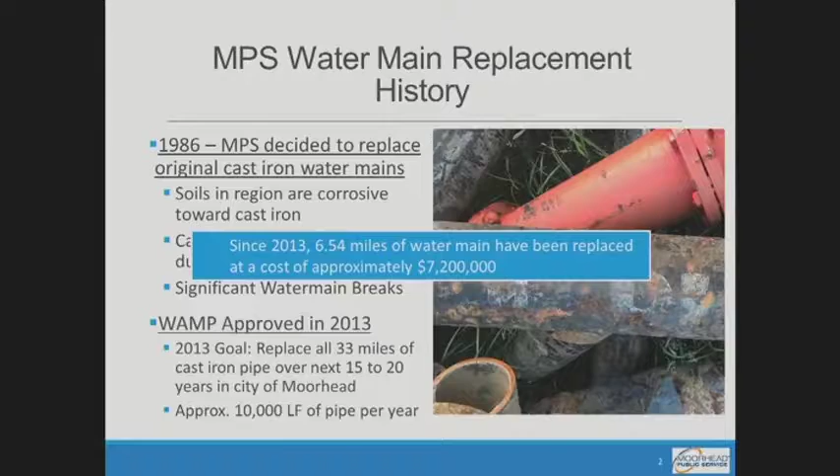I'll highlight a few things with regard to the money we've spent and the impact it's had on water main breaks.

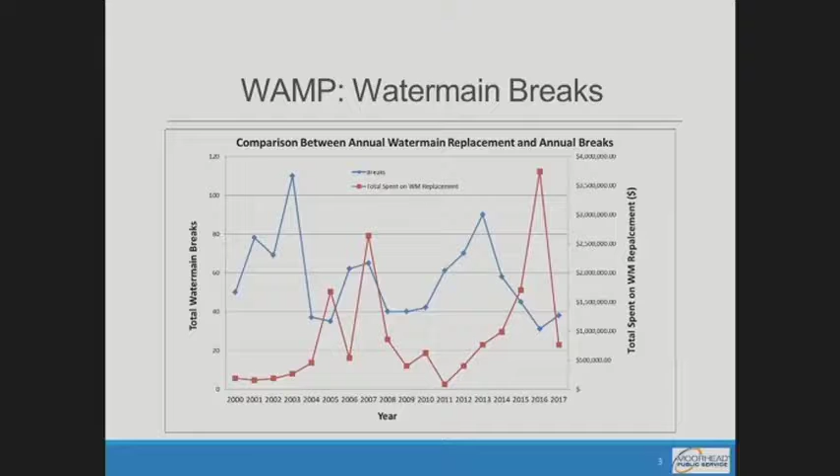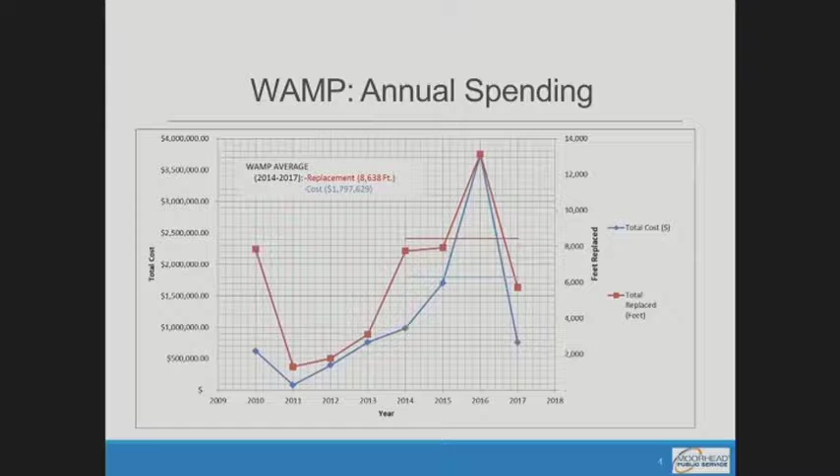But in years where we're doing replacement in residential areas, such as 2014, 2015, and 2017, that spread becomes greater, meaning we're doing replacement on a more cost-efficient basis, getting a higher amount of water main in for less cost. We take an analytical approach to how we can get the most replacement for the least amount of money, since we have a fixed amount of money to spend, and we really try to get the most footage we can for that fixed amount.

Collaboration is important for a variety of reasons, mainly that we can save on pavement restoration costs. Depending on the project, sometimes we'll bid it separately from the pavement project, since the contractors that bid on our work might not be the same ones that bid on a street project. That's the case for Center Avenue this year, with two different bid packages: the MPS water main project and the street project. So they're two different bid projects, but there's oftentimes a financial incentive for doing that.

Because pavement restoration is such a huge part of our total cost for replacement, that's really where we focus on reducing the amount of pavement we have to restore. Just by coordinating with the city, and the cooperation we've had with them, we were able to save roughly $240,000 in '17 and '18 on those coordinated projects alone. I'll talk a little about how those savings were realized, but the important piece is really good collaboration with the city and being able to do projects together.

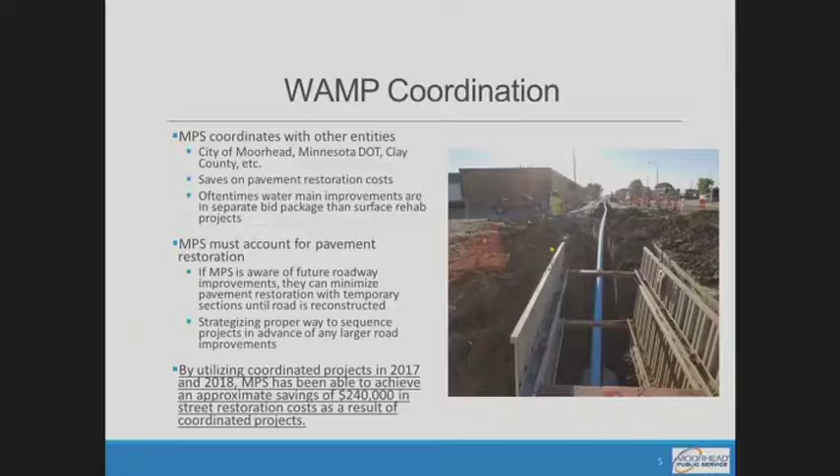One of the main reasons we were able to realize some of those costs was utilization of something called trenchless technologies for water main replacement. Trenchless technologies are really three different construction methods we use to realize those cost savings: horizontal directional drilling, pipe bursting, and slip lining. Those are the three main methods. We've used all three of them, particularly in the downtown area.

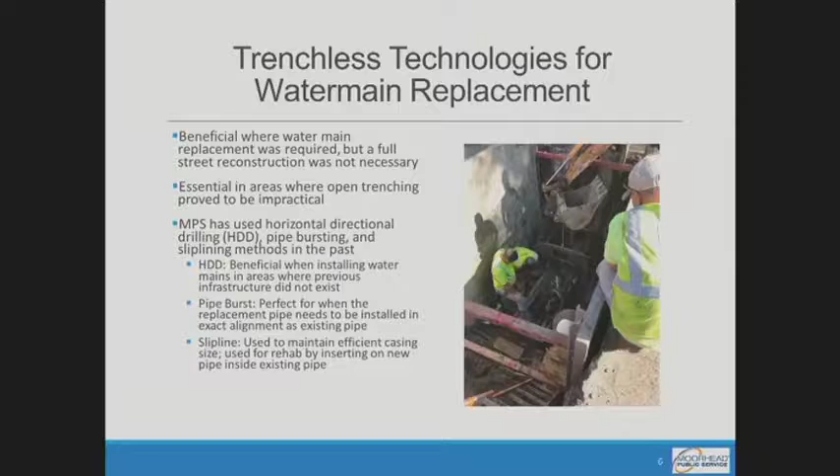We've had really good success using pipe bursting and directional drilling. Directional drilling was primarily used on Sims. We'll be using pipe bursting and directional drilling on the Center Avenue project upcoming here in 2019. Slip lining is actually where you put a new pipe inside of an old pipe, and we used that for a large portion of Center Avenue, generating significant savings as a result of using that technology. Just to give you a little flavor for our replacement portfolio and how we've integrated those technologies into our construction methods...

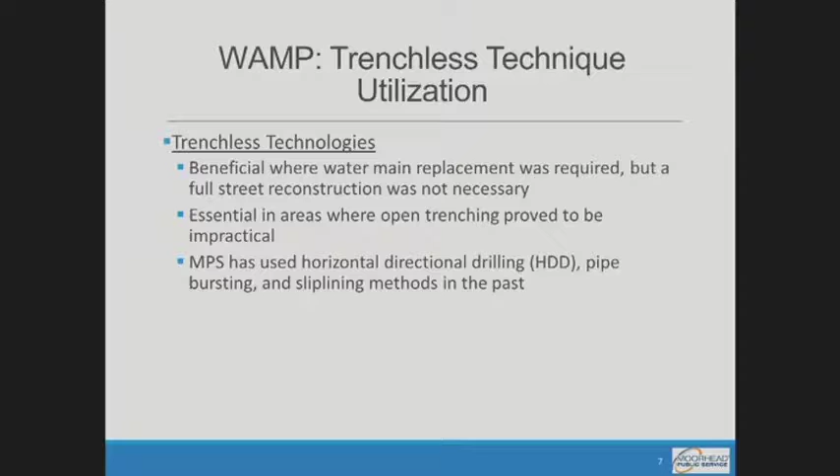In this particular project, we were fortunate that the city identified this as a really high priority project, and the city actually changed some of their plans to fit this project in for a street rehab project. So it worked fantastically well.

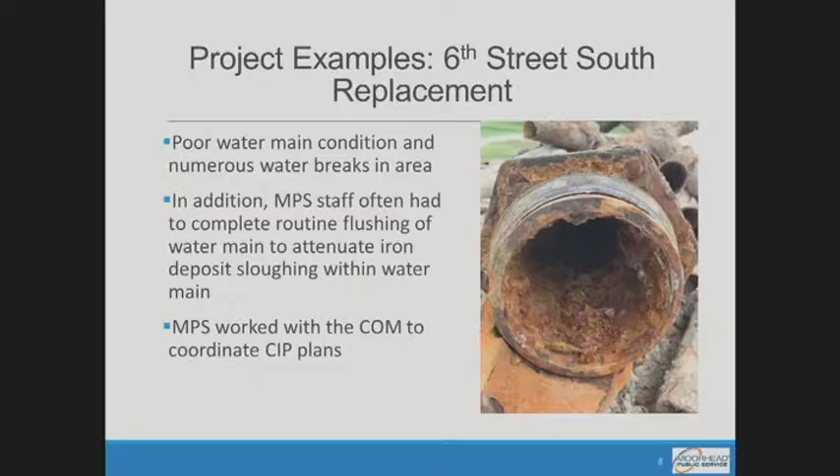And we got some really good feedback from the residents. We were able to pull that pipe using pipe bursting, basically pulling that new pipe in the existing alignment of the old pipe. We got good feedback from the customers, very little disruption to those folks, and they were very pleased when we were done. No more rusty water complaints. So a very good project that we were able to do cost effectively.

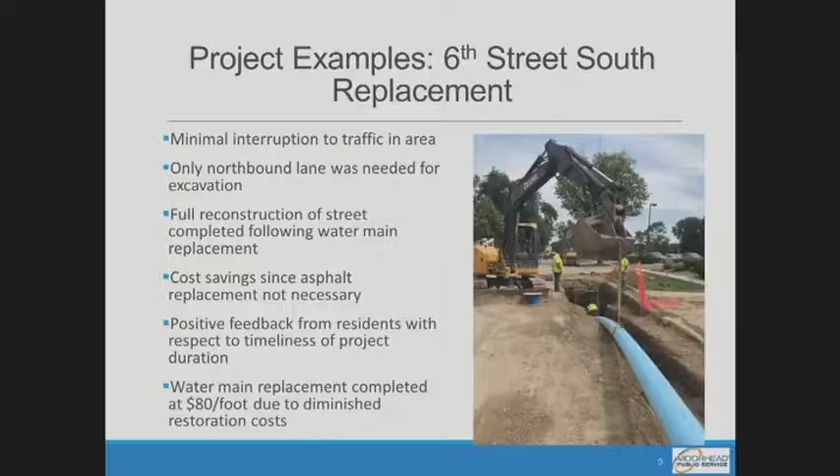Instead of bringing the asphalt completely up to grade, we only fill the pits partially full, so it's just a few inches below grade. This saves a lot of money on asphalt for the pits themselves. The city then comes in and mills the rest of it off, so there's no additional cost to the city, and we save on the reduced asphalt needed to fill it partially up to grade.

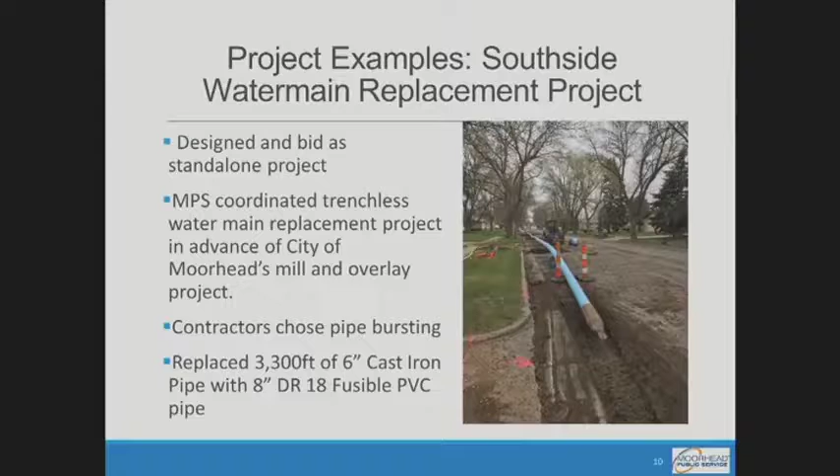Here's another picture of that particular project. When we have all those pits open, safety is a big concern, so we had to make sure snow fence, appropriate road closures, and everything were maintained. We got a lot of positive feedback, it was pretty minimally invasive, and we were able to get in and out in about a two-month period. The project went very well.

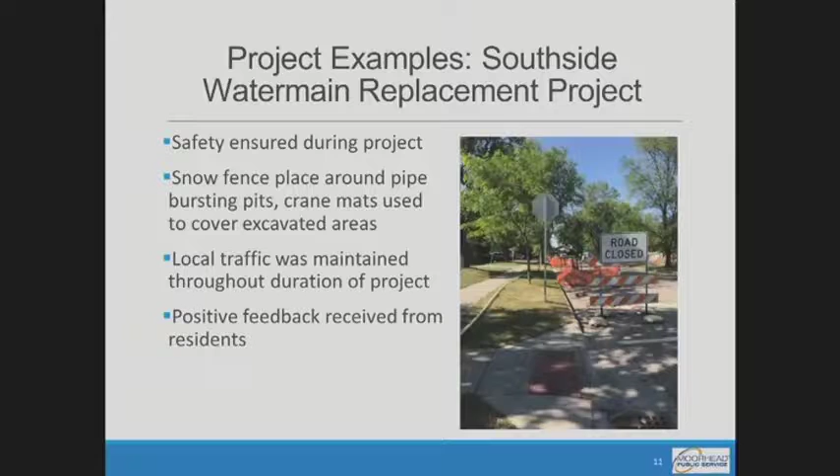I just wanted to provide a couple of examples, one of a self-performed project and one of a contracted project. Typically our breakdown of self-performed to contracted work is about 50-50, but lately, because we've been doing so much more water main replacement, we perform about 40%, and contractors do about 60%.

Looking into the future and some of our next steps, I wanted to highlight some of the areas we've completed since implementation of the WAMP, and some of the areas we're going to need to work on going forward.

What changed in the techniques or composition they used? A couple things - construction quality was reduced because of the war effort, and the factor of safety changed. Factor of safety is an engineering term for the degree of safety in the design standards; it went from a 10 to a 3, so a higher factor of safety represents better construction. They reduced the factor of safety significantly. Ultimately, the pipe wall is thinner, and that thinner pipe wall contributes to more water main breaks and faster, more corrosion issues.

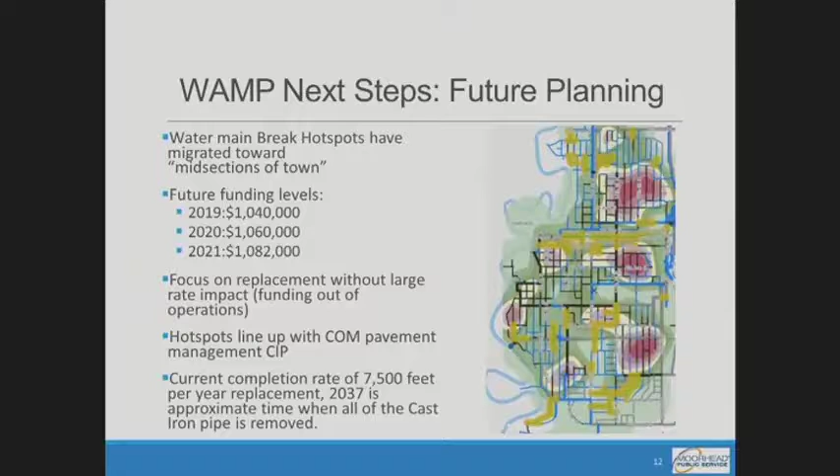Some of the things we'll also be working on is continuing to maintain our system, doing additional valve replacement and hydrant replacement as we can. We've had a real strong focus toward replacement, but that's taken a bit of a back seat to our maintenance tasks. Over the next couple of years we'll have to work some of those maintenance tasks back into our construction routine. So that's the presentation. I'd be happy to take any questions.

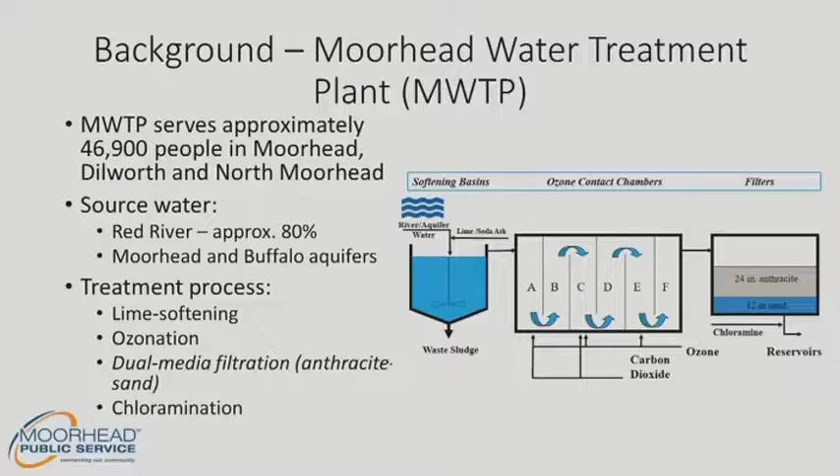We mainly use the Red River for source water, and one of the challenges with that source water is that the water quality fluctuates a great deal based on seasonal changes. In the spring, we often get spikes of organic material, lots of mud or other debris going into the river. Those factors really complicate the water treatment process for us.

I call them influent TOC spikes, which just means more organic materials going into the river. One of the challenges we have is those spikes often occur when the water temperature is really cold. In the early spring, the water temp is just barely above freezing, and that's when we start to see runoff, and a lot of those organic materials go into the river.

Our ozone treatment process is really good at taking out a majority of those organic compounds, specifically the ones that cause taste and odor issues. However, there are times when the ozonation process can't remove all of them. So a couple of the things we'll talk about tonight are these two chemicals called geosmin and MIB. They're secondary metabolites of bacteria, and if you've ever tasted or liked the taste of beets, that taste is attributable to geosmin. So if you like beets, you like geosmin. If you don't like beets, you'll probably find the taste off-putting, and you'll probably call and complain about the taste of your water if geosmin is in it.

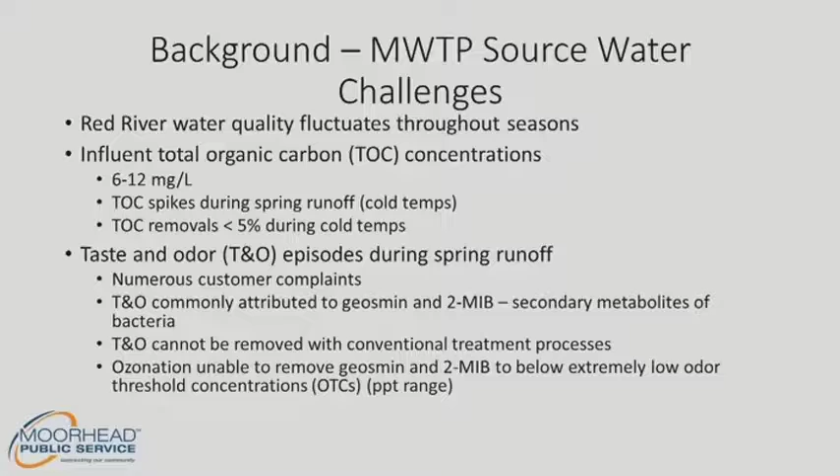As I mentioned, in 2017 we did a cooperative purchase with the City of Fargo to purchase this pilot equipment. The purchase was based on the fact that our existing anthracite sand filters, the anthracite media in those filters, is in need of replacement. It's been operating since the plant was built, and it's operated very well, but the lifespan of the media itself is about 20 years, and we've been operating it for 20 plus years now.

So we wanted to look at replacing it with something called biologically activated carbon. If you've ever used a Brita filter, the black stuff in that Brita filter is carbon that ultimately becomes biologically activated carbon. So it's pretty much the same material as what's in a Brita filter.

Before we could implement that change, we had to do a year-long pilot study because our regulators wanted to see the performance of that media proven in our treatment process. We wanted to compare basically 3 different types of that media. There are all kinds of different flavors or makeups of BAC, so we had to try 3 different kinds. Ultimately, we wanted to evaluate those respective media against each other for hopefully full-scale implementation in the Moorhead water treatment plant.

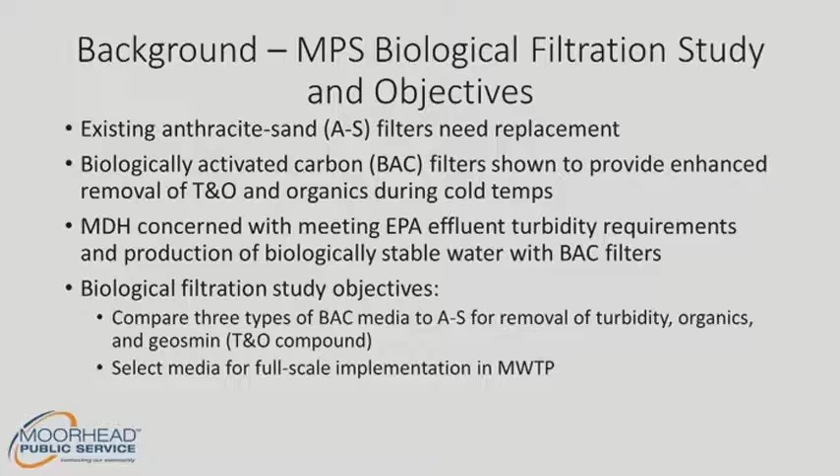One of the things we utilize in the skid process is a little pump that can feed taste and odor compounds into the skid system. We actually bought a large amount of geosmin and MIB to make sure we could feed it into the system and artificially confirm that the media would remove it. So we'll be talking a lot about that. One important note: this pilot filter skid, we never used any of the water that ran through the skid in our treatment process. It's like a sandbox - we wanted to use it purely for experimentation purposes.

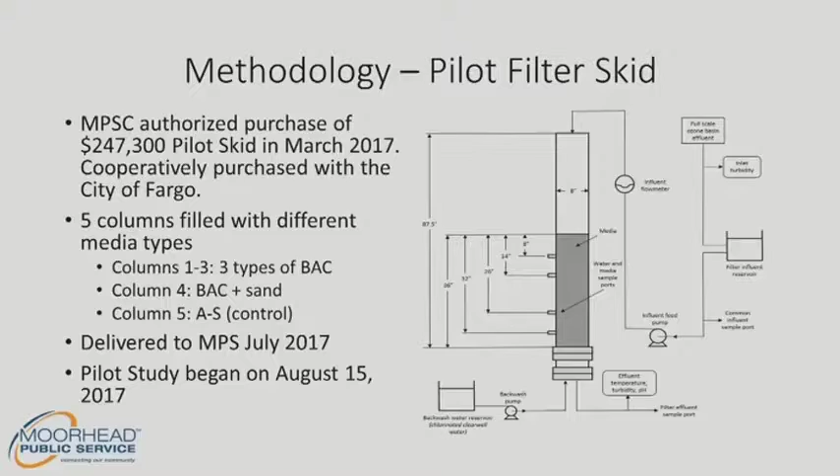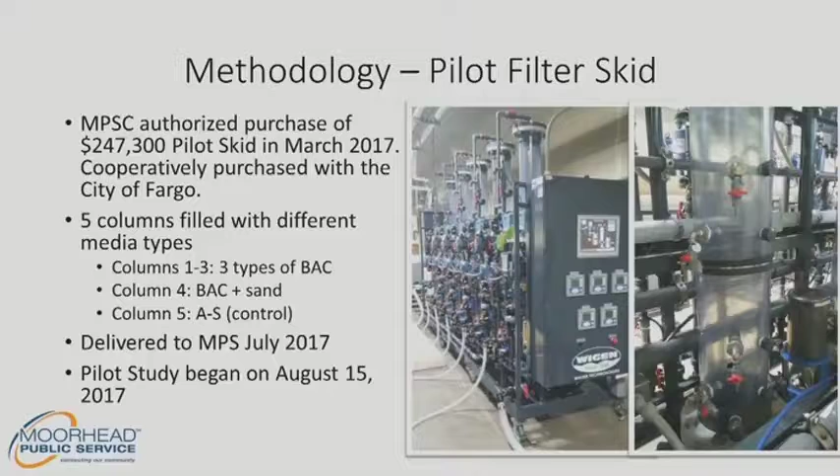Here's a close-up of what the skid actually looks like - again, 5 columns. This is a picture of the column empty. When we filled it up with the media, it's just about 36 inches of black BAC material.

One of the main criteria we use for evaluation of those respective filters is measuring the clarity of the water that is produced from those filters. Basically, dirty water comes in to the top of that skid through each filter, and then we measure the clarity of the produced water.

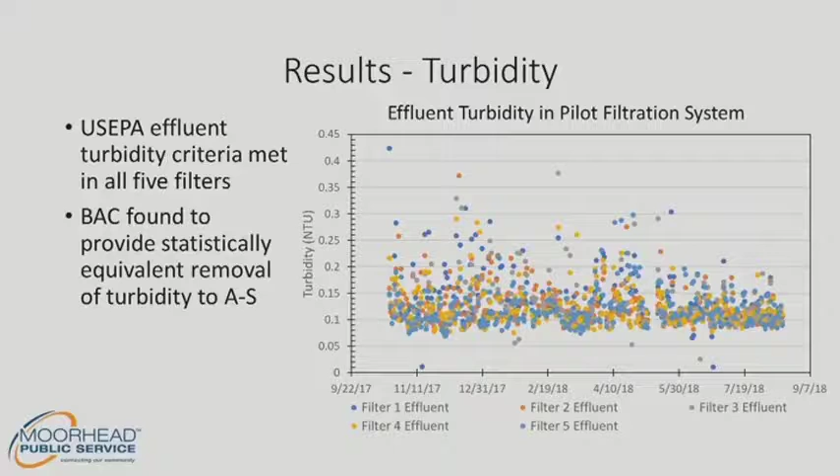What we're trying to show here, the blue dot is the control filter. So if you see those blue dots, it's at about the 0.1 range. Filters 1 through 4 are those different types of GAC materials, so they pretty well match the performance of filter 5. What we found is that actually all 4 of those respective media provide a statistically equivalent removal of turbidity, meaning they're all removing the same amount of particles. That's a good thing because it verifies that the BAC material we'd like to use produces about the same quality of water with respect to turbidity.

Then the other important component we looked at was TOC removal efficiency. TOC stands for total organic carbon, the organic material that's in the river. We were interested in cold weather removal of organic material because, as I mentioned, those organic influxes occur when the water temperature is really cold.

What we found was, if you pay attention to number 5, a higher bar on this chart represents a higher removal efficiency, which is a good thing. 5 is the control. F1 and F3 represent filters 1 and 3. There we see significantly higher organic removals, specifically in that below 10 degrees C area, as compared to filter 5. So either one of those BAC materials will provide some additional removal as compared to just anthracite. That's a significant finding because that's really the target of this treatment procedure. We wanted to get more organic removal with this material.

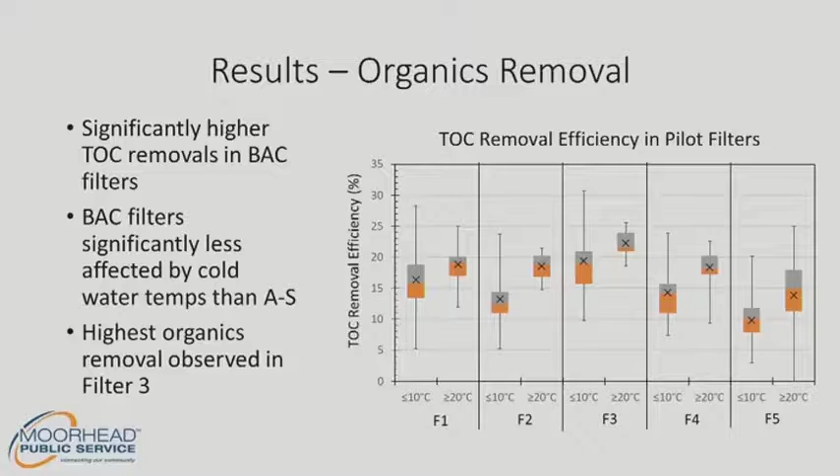As I mentioned earlier, geosmin is one of the taste and odor compounds that we get concerned about, specifically in the spring. So we dosed a lot of geosmin into the pilot filter and basically saw how well the different medias would remove it.

Here, pay attention to the orange dot. The orange dot is the control column, and 1 and 3 are the red and purple dots, the ones we're going to compare. If you see that orange dot, basically in phase 1 of the dosing period, we dose a lot of geosmin. F5 doesn't take out very much of it, and then we turn it off, and turn it on again. Again, F5 still has a very high level of geosmin passing through that filter material.

Now going back to the red and purple dots, F1 and F3, there we see that the geosmin concentration in the produced water is much less than the control columns. That's what we want to see. We get quite a bit of additional removal with those BAC media. Both 1 and 3 performed similarly, although filter 3 removed the most geosmin.

This is like a crisis level geosmin concentration of 150 nanograms per liter. We've never seen that in the Red River. We usually see about 20. There's probably times when it gets much higher, but suffice it to say our water plant smelled like geosmin during this period.

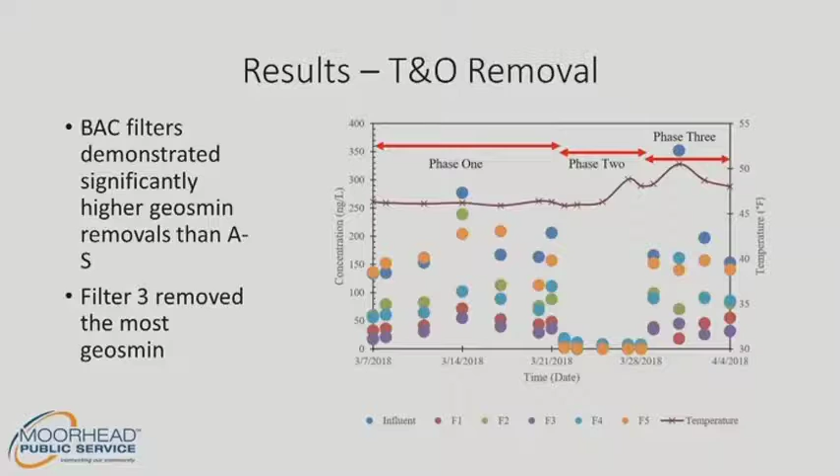Here's just a brief summary of the removal percentages. We did 3 different taste and odor trials, really focused on periods where the water temperature was cold, early to late March. For those 3 trials, we actually got the best removal on filter number 3. So in our upcoming project, we're looking at specifying filter number 3 as our best performing media.

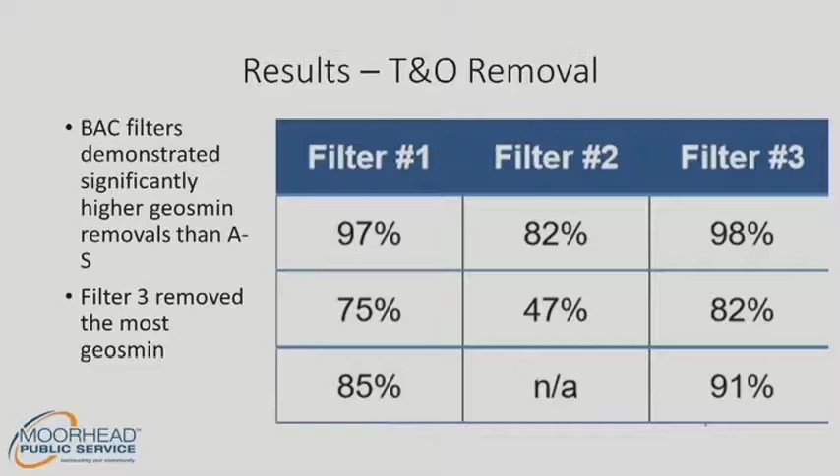Interestingly, we worked with NDSU, a couple of NDSU graduate students, for a variety of purposes on this project. There are literally thousands of data points that were collected, actually much more than that. Much of it was done by hand. NDSU has some tremendous facilities from a research standpoint that they were able to utilize to benefit the study.

Interestingly, this is an image of scanning electron microscopy. We wanted to see the biomass or the material growing on the media itself. What we found is, basically on the left-hand side, that's all just native media as you buy it from the store, so not much biomass growing on it. On the right-hand side is after the media has been in our filter, we see some significant biomass on GACs A and C, significantly more even than the anthracite itself.

We think the biomass contributes to the overall performance of the media in that it actually enhances the removal of a lot of the compounds we're interested in. We're still working on quantifying that difference, but on a visual basis, it appeared that we saw more biomass on the GAC media than the anthracite.

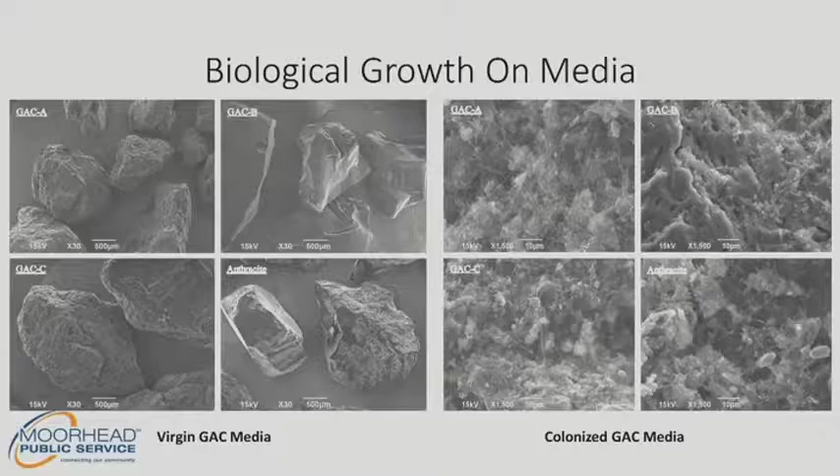So ultimately, we elected to go with the filter number 3 media, which provided pretty much the same turbidity removal as the control, with some additional TOC and taste and odor removal properties that we were interested in.

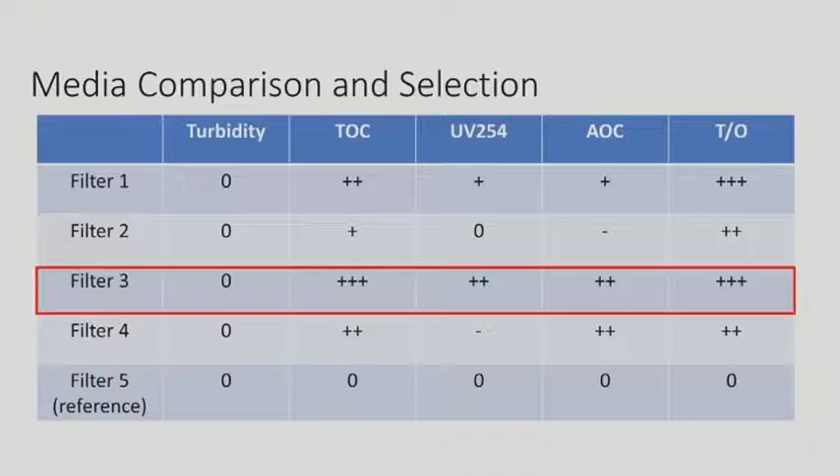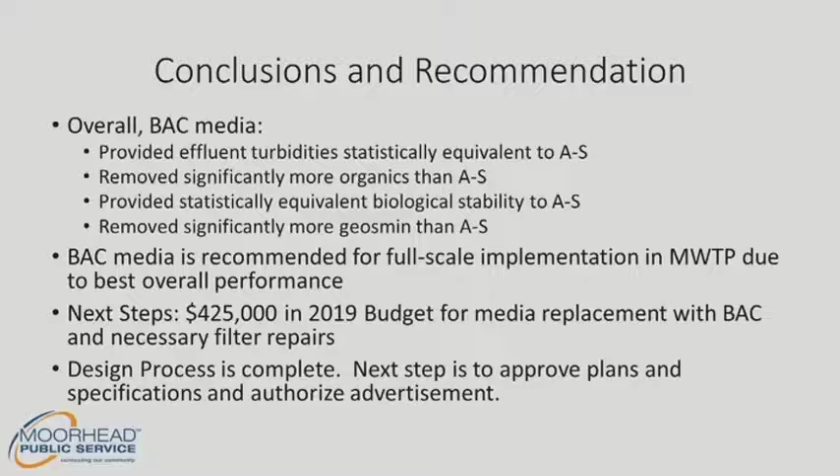So really the impetus for us moving forward is to look at putting in that BAC material in our full-scale plant. It offers some big advantages in terms of organic removal and taste and odor compound removal. We have $425,000 in the 2019 budget for replacement of that media, and we actually have plans and specifications ready tonight to approve moving forward with the process. It'll be a big upgrade for our treatment plant, and hopefully offer some additional potential for removal of taste and odor compounds. I think it'll really enhance our treatment process, and it'll be good for our plant.

A huge list of acknowledgments, a huge project team for this. Our staff has put in a lot of hours. Grad students from NDSU, a variety of students. AE2S was also a partner on the project. I want to acknowledge the City of Fargo for working with us on the cooperative purchase. They're anxiously awaiting us sending it their way in about August or September of this year. So again, a lot of effort from a lot of folks, and appreciate the support from the commission as well. That's the presentation with respect to the filter media, and I'd be happy to answer questions.

No questions? So basically, we would replace what we have in there, it would all come out, right? Yeah, so I didn't get into the detail about that. Basically, we're going to take the top 24 inches of anthracite. Right now our existing filter is 24 inches of anthracite, 12 inches of sand. What we've elected to do is actually just skim off that anthracite, so they'll come in with vac trucks and suck out that anthracite, and then put in 24 inches of GAC material. So brand new, out of the bag GAC material will go into the filters. That's pretty much the majority of the project.